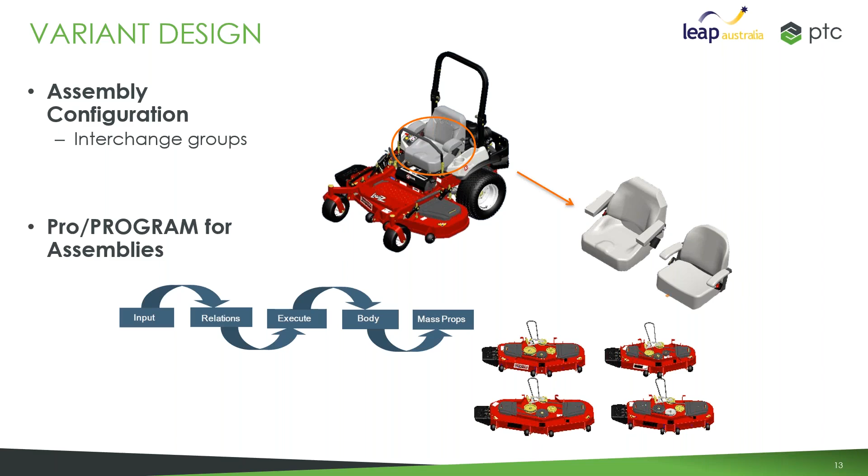Okay. The second method is using Pro Program, another very powerful feature in Creo. By running simple logic like showing or removing certain features, or replacing and deleting parts, the design can automatically and intelligently update. Okay, so let us come back to Creo.

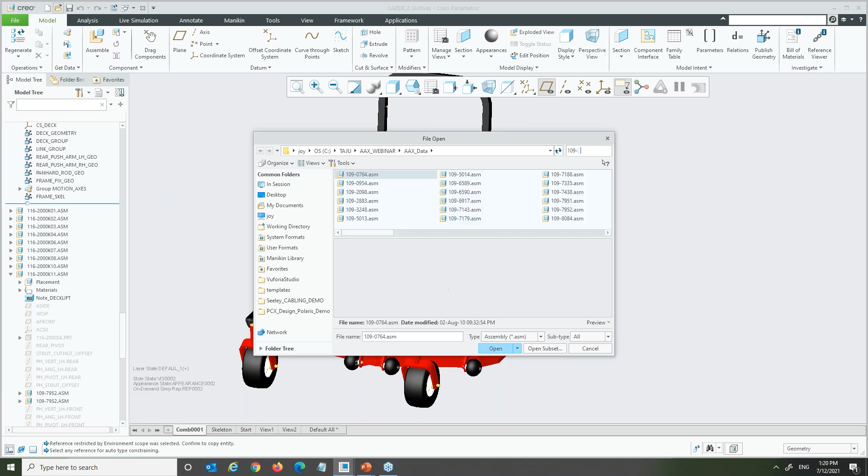So I need to give a bit of introduction to Pro Program. I know some of you are probably not familiar with it. So what I've got here, if I just look at my assemblies inside my directory here, let me just filter. I know the number for my deck assembly, so I'm filtering some of the variants I've already created. So I've got a few variations of my deck assembly here: 8593, maybe another design here, 8594, 896 and so on.

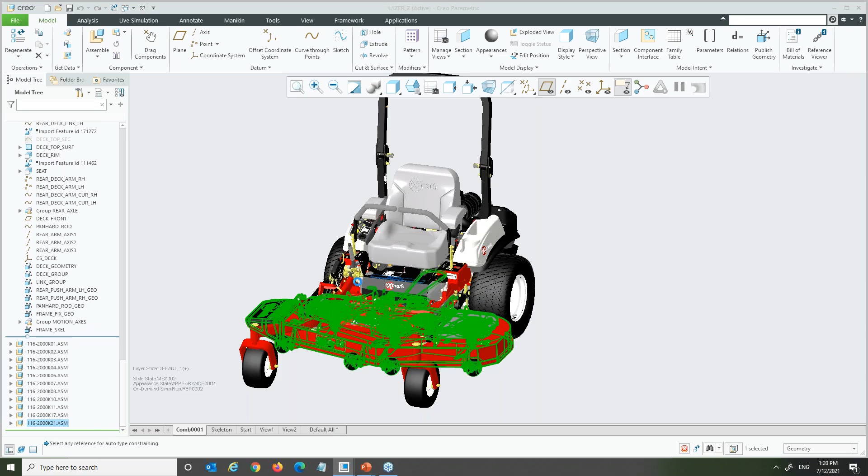Okay, so based on the customer requirement, I would like to easily get what needs to be replaced. So the first method here is Pro Program. With Pro Program, I can give some logic to easily swap the deck assembly. So before getting into the deck, to show you the Pro Program, let me activate that deck subassembly here for the lawnmower and show you what I've got in the parameters.

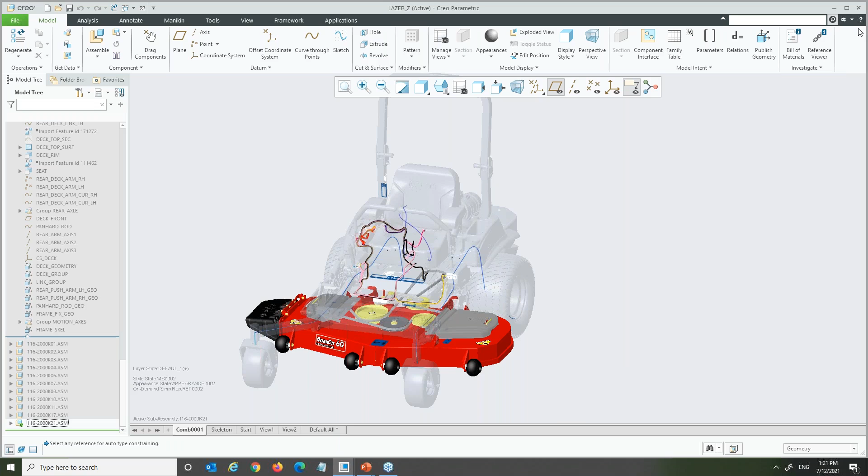So in the parameters, I've got a very basic string parameter called deck type. It's a string parameter, and it gives the part number for the deck assembly, which I showed you before, 8593. So if I just show you the Pro Program here, I've got a very simple logic. It's nothing but an input. When I regenerate the model, the deck type string parameter will come up with an input statement, and the user can enter the deck he would like to replace it with. Options are given, like 8592, 8593, or 8594, and so on.

When Creo regenerates at the stage where it needs to regenerate that particular subassembly, based on the input value, the system will automatically pick that component from my directory, or from Windchill if I'm using the PDM system, and then the system will regenerate it for me. Okay, that's the whole idea.

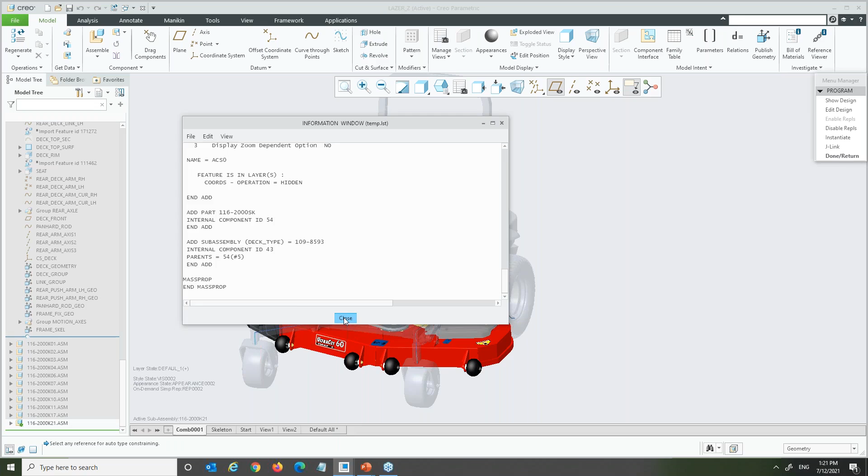Okay, having said that, now all I need to do is regenerate my model, and the system will give me that Pro Program input. I can use the current value, or I can select the deck type, which is the parameter I defined at the assembly level, and just pick it. I have the option to pick which subassembly I would like to use here. So, just as an example, I pick 8594, and you can see the system update that deck assembly instantly. Okay, there are some error notifications, I can disable those. Okay.

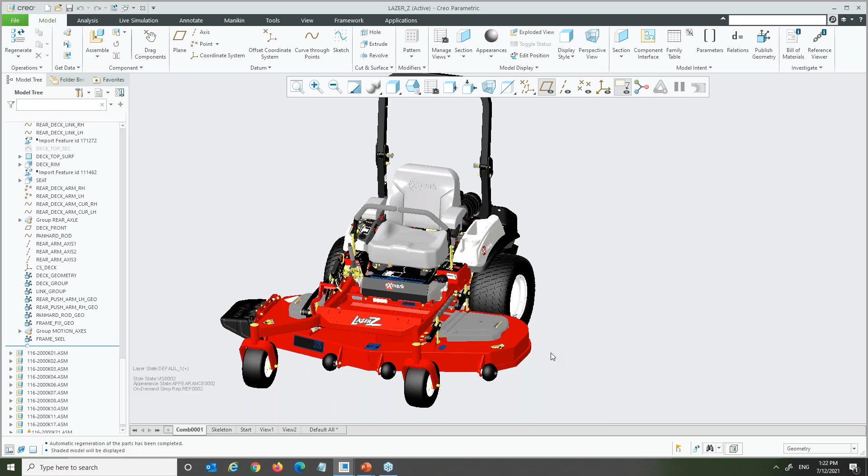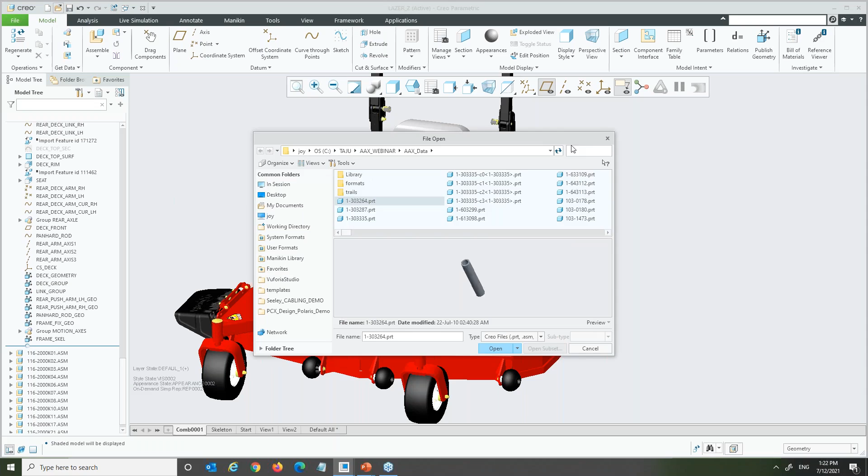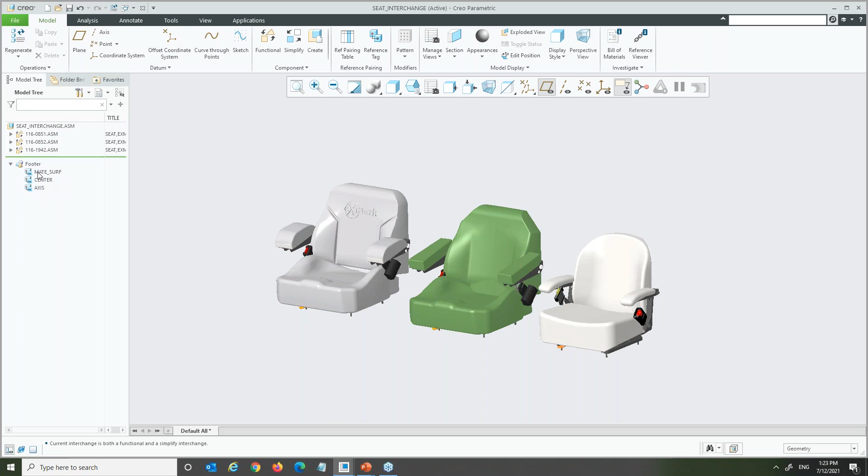All right. Now, another way of substituting a component is the interchange assembly. In this example, I would like to swap the front seat for the driver. But before I get into that, I would also like to explain what an interchange assembly is. It's again a really useful tool. Okay. So here I've got three different variations of the seats. What I have done is create the same interfaces for assembly constraints, the same constraints for every single component subassembly here. So using these references, Creo can swap the components very easily.

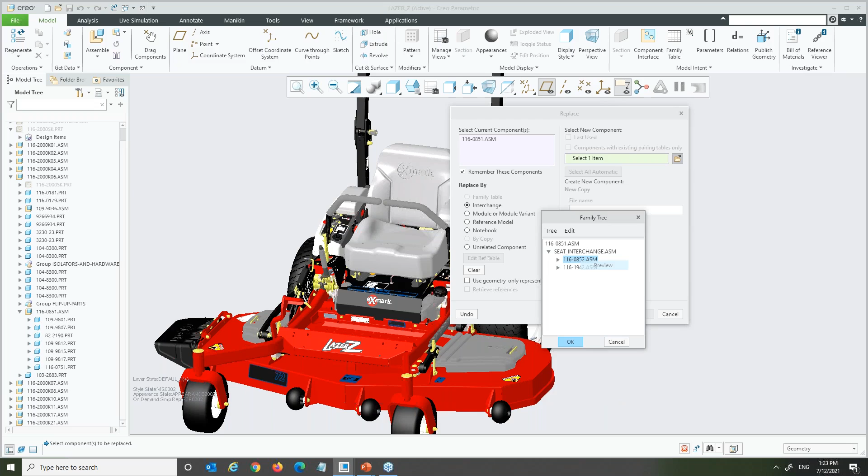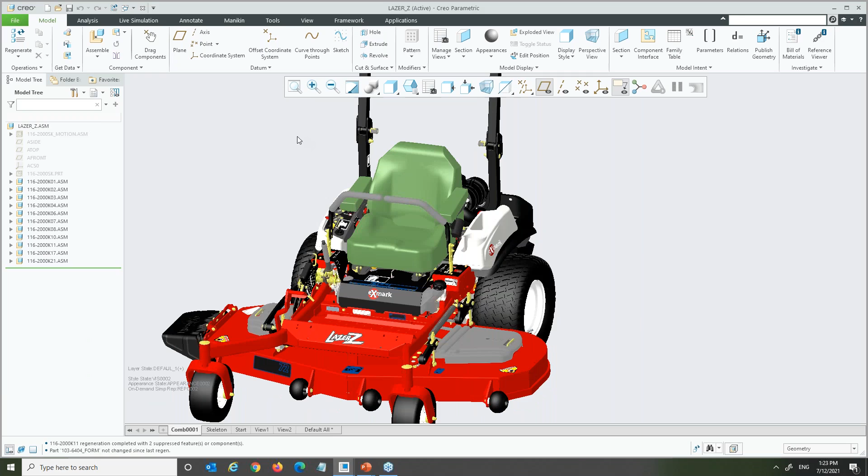So all I need to do now is pick and replace my seat subassembly using the standard replace functionality. If the interchange assembly has been configured, I get the option to select which interchange assembly I like. Even before placing, I can look at the preview. Okay, and I can select which component I'd like to assemble. So let us select that green color assembly and apply the changes. So again, it's a really nice, easy way of updating a particular component or subassembly inside top-down design and creating that design variant very easily, based on your customer requirement.

I just want to summarize what I've shown you today. What you have seen today is an overview of Creo advanced assembly functionalities, the tools that help your team work together, saving time to finish designs quickly and efficiently. It improves product quality, as you spend more time on innovation rather than rebuilding your CAD assembly. Because you are saving time and producing a better product, as you can easily create variations of the designs, a company can get its product into new markets much faster.